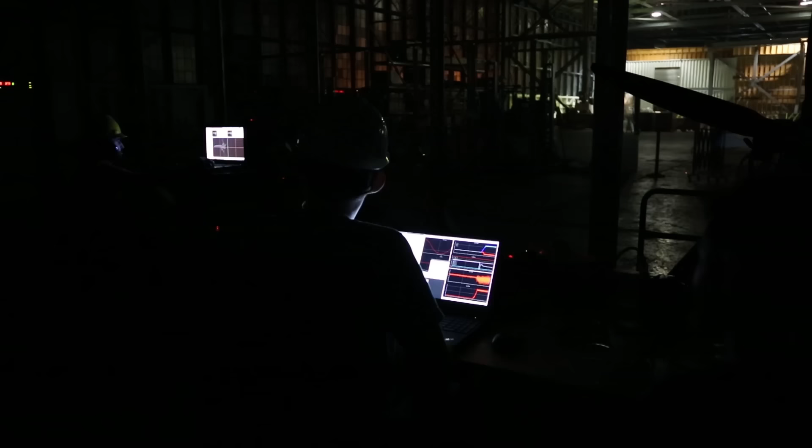It was heroic on a structural mechanics front, it was heroic on a material science front, it was heroic on a power electronics front, it was heroic on an aerodynamics front, it was heroic on the control systems front. It was not a walk in the park on any vector, and it was world firsts on every single front.

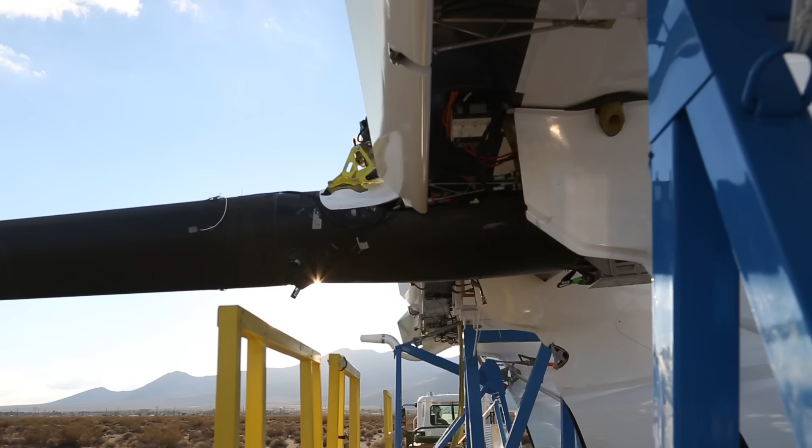Today, our challenge is climate change. We cannot turn away from it. I absolutely believe that we can do something about it. That's what engineers are good at, solving problems, and this is a big one. You very rarely work on something so open-ended. People believed in the audacity of it, in the individuals and their capacity.

All right, it's you now. Oof.

You never know if you're gonna succeed, but one thing for sure, if you don't try, you're not gonna succeed. It's not like one single idea that's gonna solve global warming. It's too big of a problem to be solved by one thing. It's gonna be the combination of multiple ideas from multiple people all over the world.

We got 5 minutes of autonomous flight down. Is that really? I don't know, not in a row. And we got 4 dead kites. Yes, we do. Very dead. 2 were more dead than others.

I guess I like to think about Makani as we're taking wind turbines and we're thinking about what is the best possible system we can build instead of a wind turbine that extracts wind energy. What's the most optimal system? And then we're trying to build that.

In late 2006, I joined Makani Power as the company archivist. Earlier that year, a team of engineers and kiteboarders had begun experimenting with how to harness wind energy using kites. Kiteboarding gave them a visceral understanding of the power available in the wind, and they wondered if they could replace the heavy steel towers of wind turbines with a lightweight, tethered airfoil. If the idea worked, it could revolutionize wind power. So I set out to document every part of the process.

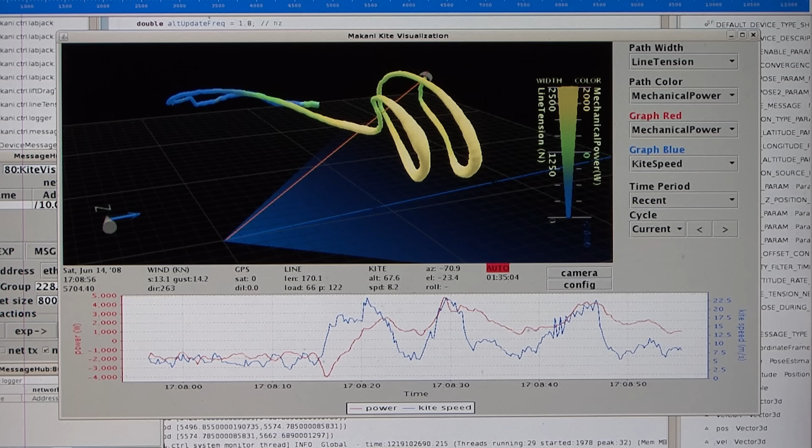After a while of looking at these soft kite systems and developing a simulation capability and analytical capability within the company, we found that the promise of a rigid wing architecture was much higher. This leaves a big problem, though, of how do you get the thing in the air. We started by building a very complex wing, and it was almost the exact opposite of the very quick iterate and test that's possible with the soft kites. We went ahead and built, fully off of simulation, a very complex system. The problem with this is that there's no interaction with reality. So all it takes is one mistake by one person to lose a device like that. That's not a great way to prototype. That's not a great way to make progress.

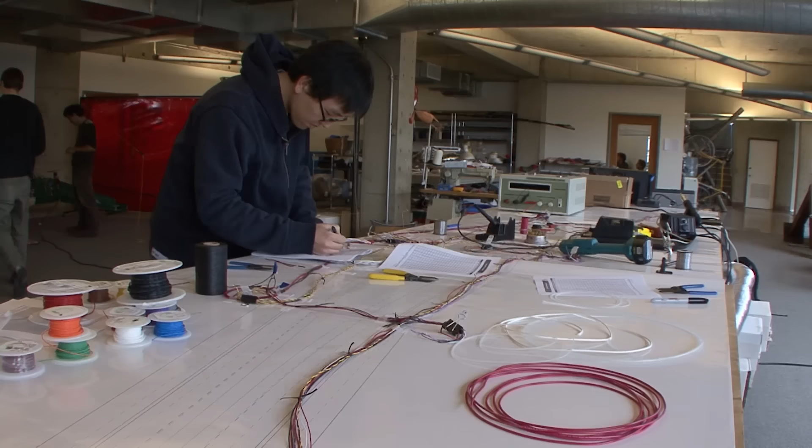It took us 9 months to build our first rigid kite, and we only made one. For a team used to flying and exploding soft kites, having only one prototype felt like not just a bold step, it seemed reckless. For a couple of months, we hovered it under a safety constraint line out near Santa Cruz until we felt like we were ready. Oh. 2.6 seconds of flight. As the 9-month kite splintered, we were humbled by how much we had to learn. The failure of our first carbon kite hit everyone hard, but a few folks on the team had been prepared for a setback like this.

So at about the time that we were getting near finishing this first very complex rigid wing prototype, we started a much simpler, faster test program. Okay, I guess we're ready. Focused on iterative testing. That was high. Bam! The day after we crashed the 9-month kite, we tested the cheap one, and it flew. Watching the kite loop successfully, we knew we were on the right path to learn all the things we'd need to know to harness wind power using very few materials.

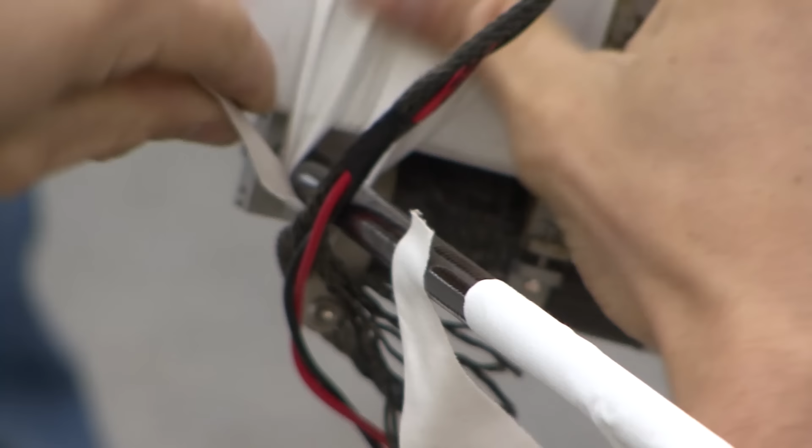Okay, let's do voltage check on constraint release. The next prototype we built was Wing 6, which was itself a little homely, a little hacky, held together by guy wires and tape and made of styrofoam. Okay, burn it.

We had committed to a rigid kite design with onboard power generation. And Wing 6 was built to help us work out some of the trickiest flight maneuvers we had to learn to control. Hovering to launch, and then transitioning to crosswind flight, the kind of flight that would generate power.

Tension is at around 35,000. Still good? Nice. Freaking awesome. Okay, here we go. As ugly as the kite was, the transitions from hover to crosswind and back had worked. Pulling together a prototype to test quickly and cheaply had paid off.

The heart of Makani was always evident in the shop, where coffee was shared, music blasted, things were created and fixed. The lines between engineer and artist, between friend and colleague were blurred. As we invented new technology from scratch, we also needed to develop a common language.

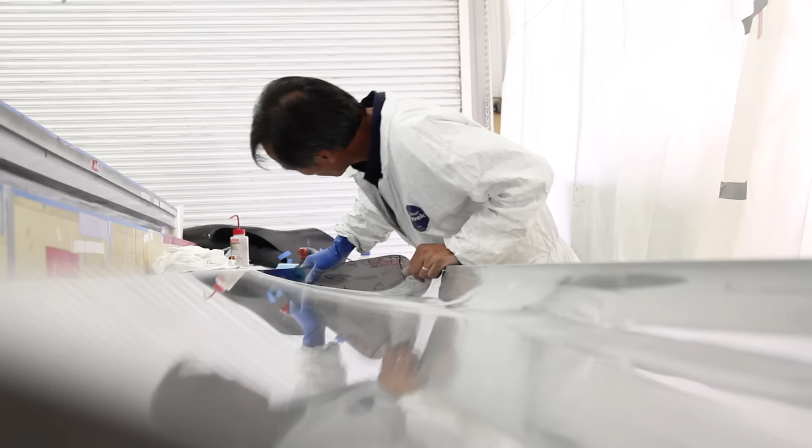Manho was a master craftsman originally from Korea who had made and flown experimental composite aircrafts of his own design before coming to Makani. Tommaso was an incredible fabricator and engineer who had heard about how we were trying to solve climate change using kites and risked everything to travel from Italy to San Francisco.

He enrolled in language school, where it would turn out that he met his future wife, Anita, who also eventually worked at Makani, and learned enough English to knock on our front door and say, "My name is Tommaso Romanelli. I want to work here."

At the end of each day in the shop, Tommaso's blue gloves would be covered in Sharpie, scraps of song lyrics and slang he'd heard and worked to understand. Professor, what's another name for pirate treasure?

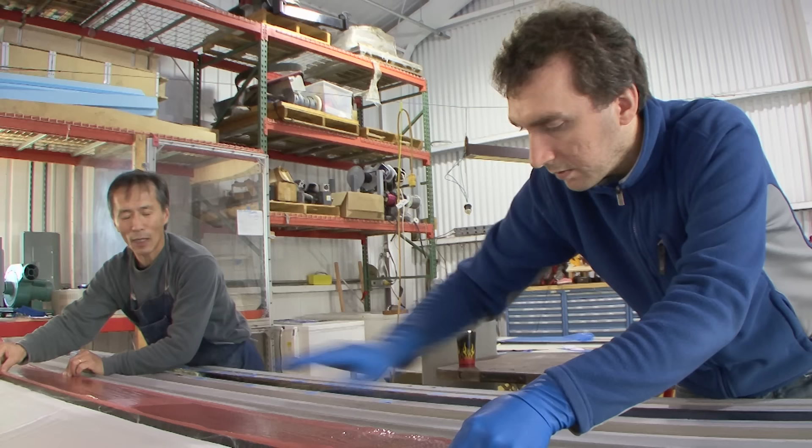Working on hardware was another kind of language, translating the invisible idea of fighting climate change into something we could see and feel, bringing us hope, bringing us together. Tommaso and Anita weren't the only couple in Makani's history, or the only set of forever friends. We'd started out building a kite, and along the way, we'd begun to build a family.

We'd been iterating quickly with cheap materials, and we'd arrived at a design that worked. It was time to build a robust prototype that could scale into a product. With rotors and generators mounted on a rigid airframe to launch, generate power, and land, Wing 7 would generate 20 kilowatts and would demonstrate all the modes of flight needed for commercial operation.

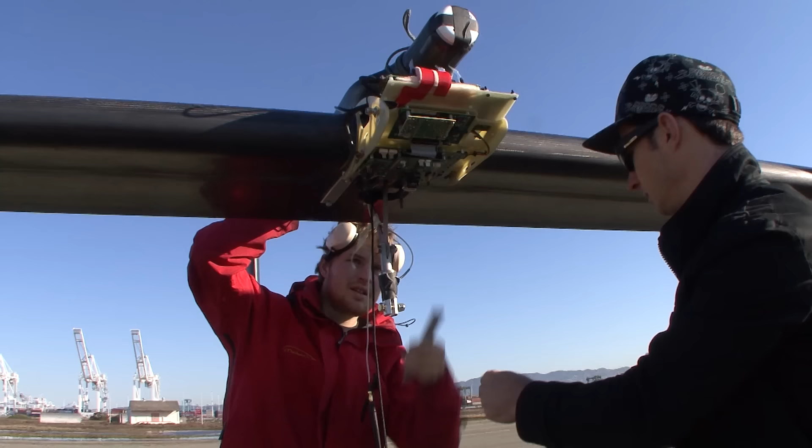Tarek, this is the first ever assembly on the runway. It's just gonna work. It's gonna be so easy. Did I just jinx it?

To support onboard generators and higher flight loads, we had to risk the time, effort, and expense of building the new kite out of carbon fiber, something we hadn't dared to do since the crash of our first carbon prototype. But this time, we had real-world data to inform our design, and we'd secured fixed-term funding from the U.S. Department of Energy and Google.org.

Even with more data and adequate funding, we proceeded cautiously, flying the kite under a safety constraint line to make sure all its subsystems were ready to work together. 3, 4. That's going. That wasn't bad, eh?

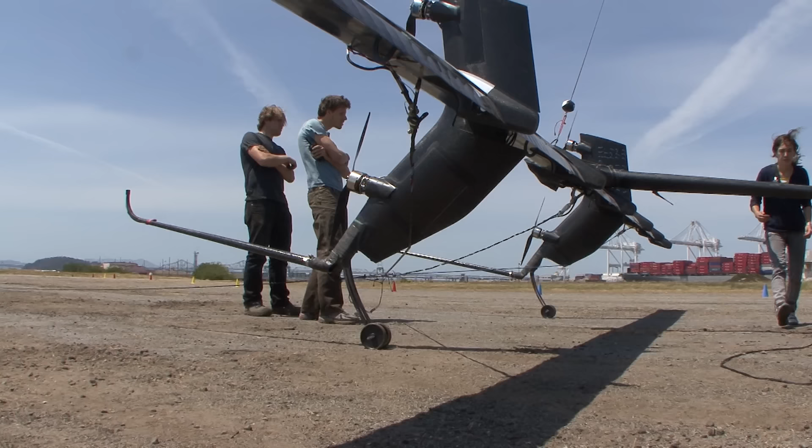No one had ever controlled an aero device like this before. A rigid airframe with the extra dynamics of being tethered to the ground that would fly like a quadcopter and then as a kite. Wing 7 returns to the ground in one piece. But the day came where we couldn't learn any more with the kite safely tied into constraints, and we had to fly it for real.

If the wing were to start coming towards us, we'd only have a few seconds to react. Does everyone have a plan for where they'd go? Something to get behind? Last flap check. Flaps look good. Pilot to pilot hover mode. Pilot hover.

Wind check. Green. 6 meters per second. Stoplight check. Green. Starting data acquisition. E-stop ready? Ready. Pilot ready? Ready. Begin test.

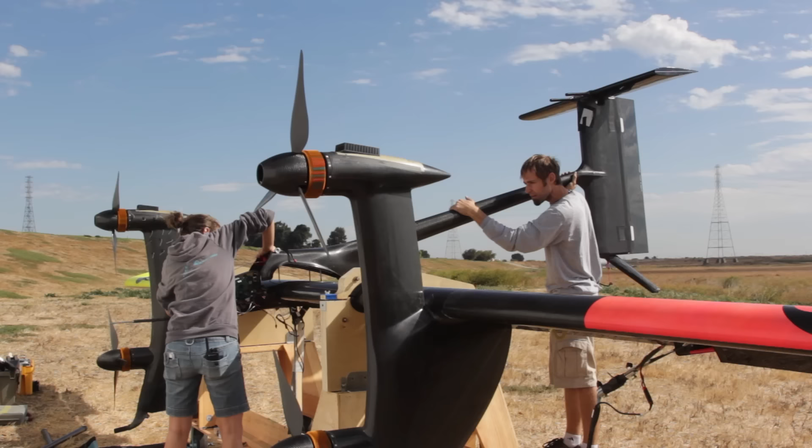Being with the small team of people, maybe we just got lucky or we have selective memory, but generally they got along pretty well. And you have a ton of work to do because you have to set up this thing. You have only so many hours before the sun sets and your test day is over. There's one unified goal for everyone, which is, let's launch, let's fly.

No, I was really hoping there weren't any snakes here. It's a gopher. It's not a rattle. Yeah, let's check. Let me just make sure. Oh, I Google search baby rattles.

Flight testing was like an itch that we had to scratch. Our team was motivated broadly by climate change, but in the everyday we got by with silly rituals, celebrations of small success, and lots of coffee. Around this time we coined the term flangry, which is how we'd feel when we hadn't flown in a long time. This kind of anxious hunger for progress.

As we put hours in the field, things broke, motors overheated, the controller was always being improved. But everything that failed taught us which parts of the system were weak. We fixed it, we moved on. It was tedious, but we inched forward, making real progress.

Then, just in the middle of our cadence of setting goals, meeting them, and setting even harder goals, Corwin, our CEO and one of the founders of Makani, died suddenly and unexpectedly. He had hired most of our team and shaped it. He had baked us bread and made us salad and laid out milestones that were just the right level of difficulty to keep us steadily moving forward.

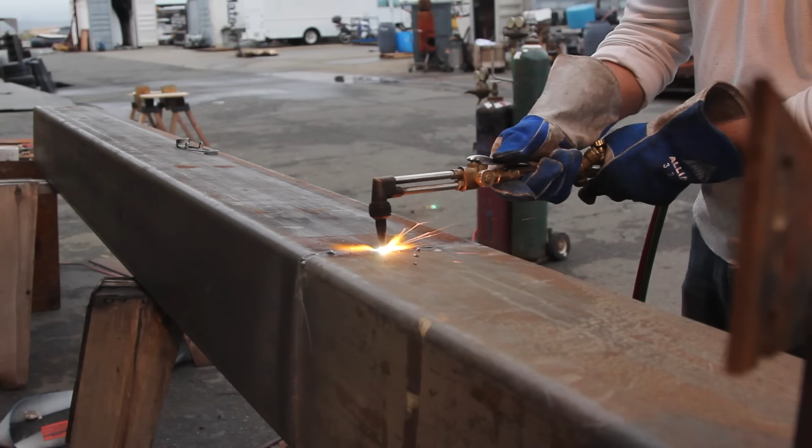With Corwin's death heavy on our hearts, we began preparing for our next big flight goal, all modes. The kite would launch, transition into crosswind, fly loops, and transition out of crosswind to land back on the perch. Coupling one complex robot to another and generating power in between was something no other kite team had ever accomplished.

The new ground station would have three main jobs. It would serve as a perch for the kite between flights. It would manage the tether during each flight mode, and it would connect the tether to a ground power system, allowing electricity to flow to and from the kite. We'd spent 6 years learning how to control a kite independently from a perch, so teaching our sky robot to interact with a ground robot would take a little time.

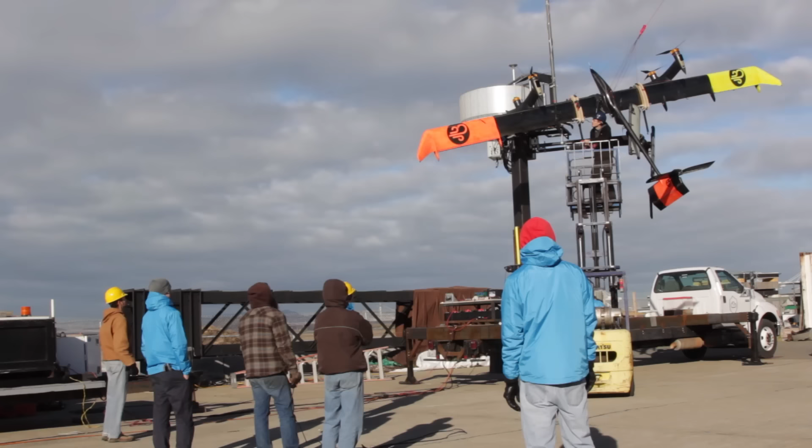We reached a point where we hadn't eliminated all the risk from launching and perching on the ground station, but we needed to test all of the modes of flight together in order to learn more about how to improve the system. We'd been pushing this challenge down the road for years as we solved other hard, but not as complex problems, and we couldn't punt it any further.

Getting the kite and ground station to perform a complicated controls ballet together was possible in theory, but we had to test it. Goal number 1, not crash. Goal number 2, take off and land on the perch autonomously, fly crosswind in the middle. Goal number 3, not crash. Goal number 4, make power.

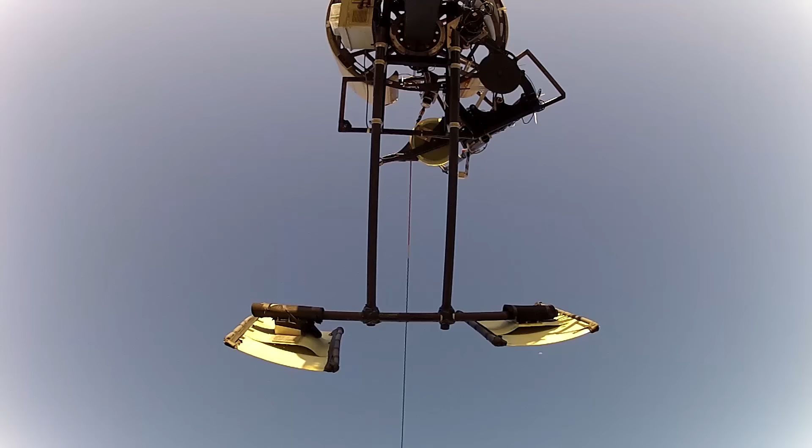XL1. Jensen. It's good. It's good. Let's crosswind. So looks good. Looks good. Wow, it's beautiful. Looks good. What are your tensions? A few more loops like that. 5,000, 6,000. You get up to 10,000. Everything's looking good to me.

It also looks like it's flying way slower. Okay, so now it's trying to go higher. Okay. Close at it. This is the highest it's gonna get. 17. That is barely flying. Alright. And it's gonna come down. It looks good. Wind looks good. 7.8.

Oh, it's very close. Trans out. Trans out. Okay, keep close at it. Alright. Okay. It's a lot of roll. Let it come back. Watch it. Things look good here. Okay. Everything's green. Everywhere out here. Things look great here. You want to bring it closer before you slow it too much?

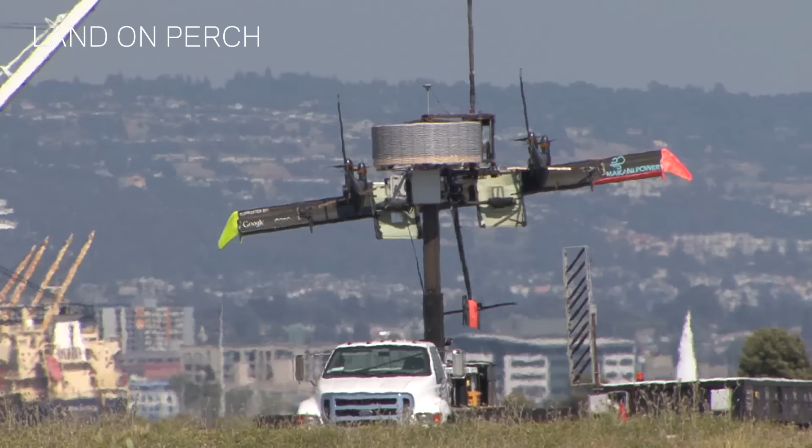Yeah. We're not even there yet. Bring it right. Okay, I'm starting to see the tether now. It looks low. Looks good to me. It does look in this part. Yes! Well done. Hey guys. Hell yeah. That was sick. Next, we're flying for 10 hours. 10 hours of awesome. Yeah, 10 hours of awesome.

Working on something hard for a long time as part of a team and watching it work exactly as you had intended it to is as good as it gets. I think that was amazing. I'm really happy with the results. I wish we would do it again, but there's no reason to today. Let's just celebrate. It just kind of reminds me at least how freaking awesome what we were doing is. I love my job.

Now that we'd proven it was possible to get the kite and ground station to work together, we went on to get flight hours. Accumulating hours in the air would teach us about the reliability of our system and would help us uncover bugs that we could refine in our future commercial kite. I think we're gonna go for 10 hours. You know what a gopher is? The more we flew, the more we learned. No, we're gonna go for 10 hours. Sometimes we achieve what we attempt.

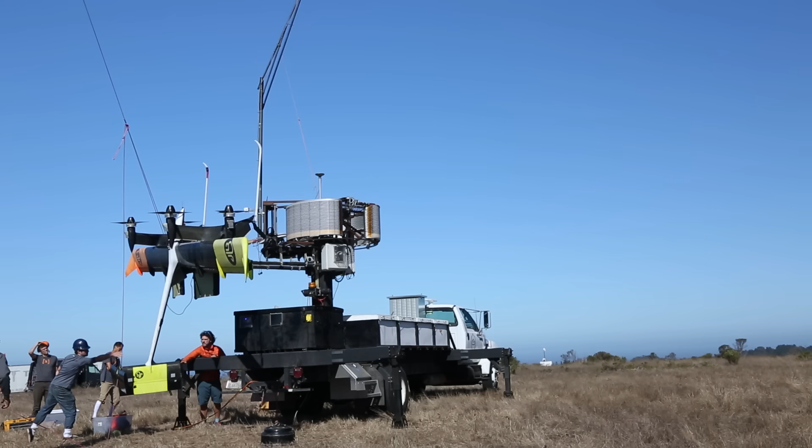Flight testing took a tremendous amount of effort, but that effort led us to better designs. Troubleshooting, swapping components in the field, and managing the ensuing operational and risk decisions took time. But we gained information from the real world that we couldn't have learned through models and simulations alone.

So that means sometimes it's thrust and sometimes it's... Yeah, sometimes it'll be thrust and drag, and sometimes it'll be like both. You're in such deep drag already that both of them are still drag. Okay, so sometimes it will even be thrust and drag. Even though Wing 7 could perform all of the modes of flight a commercial system needed, we were going to have to generate a lot more than 20 kilowatts to make a meaningful impact on climate change. We needed to build a bigger kite, and we needed new investment to make that possible.

We found the visionary support we were looking for at Google X, a newly formed home for ambitious moonshot projects that aimed to use technology to solve big world problems. At X, we would have the resources we needed to scale up to a utility-sized kite that would get us closer to expanding access to renewable energy for billions of people around the globe. So we plan to build a 600 kilowatt system. That's enough to power about 300 US homes.

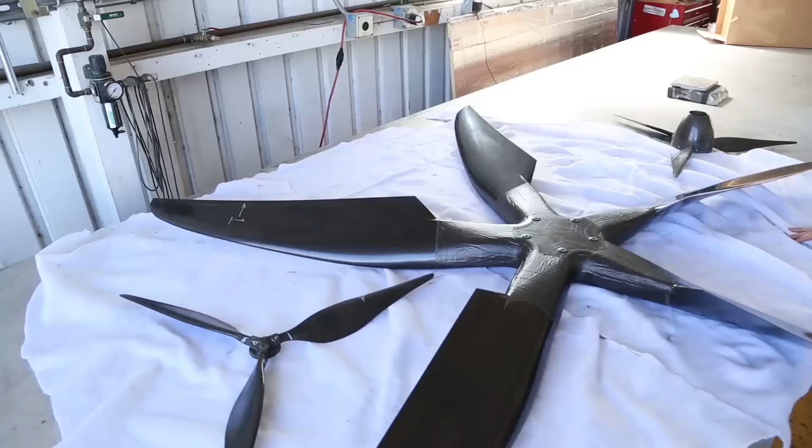We've spent a lot of time in the prototyping stages inventing the best device we can, and now it's time to scale up and start building utility scale devices that can make a real difference in the world. Makani decided to take a big step from the 20 kilowatt Wing 7 to the 600 kilowatt. And so we were designing and building it for probably about a year. Like most things in life, it's the transitions that are the hard things. So going from hover to flight, going from flight to hover.

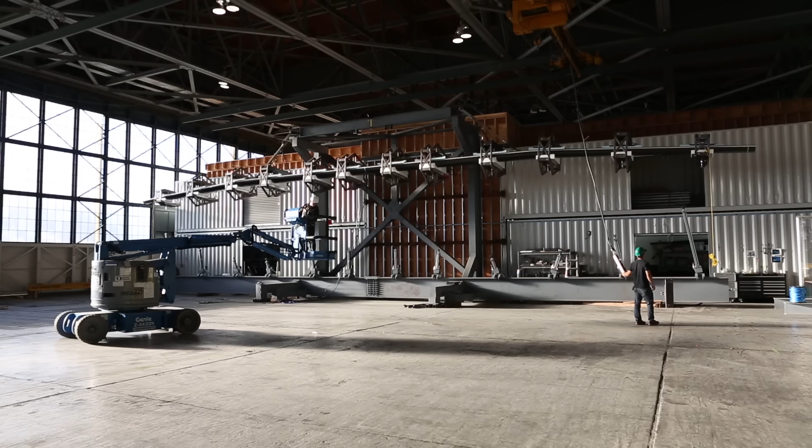I think a lot of the last year was sort of lots of little efforts going on, and it was hard to see it was all going to come together. So this was the building year, and the growing year. When I got here, we were really focusing on design. And we ran into so many hurdles. I don't know if hurdle is the right word. When the hurdle is 3 meters high, it's not a hurdle anymore. But we kept on going at it.

So I'm a little worried that this whole thing's gonna pull down. Okay, let's see, what else do I need to do here to make this look really pretty?

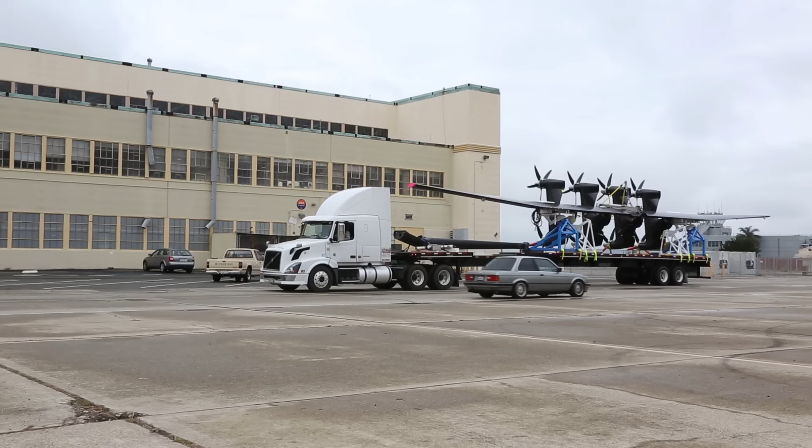Doesn't this look crazy? It looks just like Wing 7. Only giant. It's amazing. No, we're smaller. It's the same size. You guys are all the same height too.

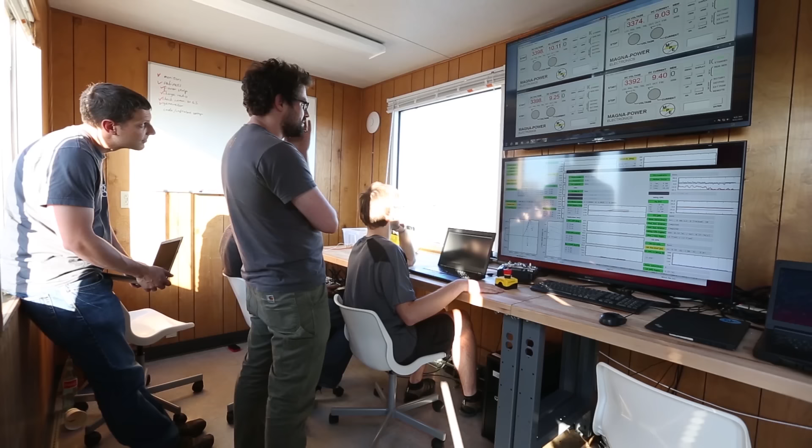It's kind of amazing. We started testing with a pretty small subset of what would make the whole system. Like the first kite that we tested didn't have any flaps or any servos for the ailerons. I think it didn't have a tail. Definitely didn't have an empennage. So we had the wrong wing, the wrong motors, the wrong power system on the ground. But yet everything was similar enough that we knew we would start learning by going out and testing it.

And so for a whole year, there was this cadence of integrate the next new system that's ready, so the new motors that we knew were the good motors came. We would spend a couple of weeks switching them and then go back out to test with new motors. The next time we go out, we had a new inverter on the ground. And that took a while.

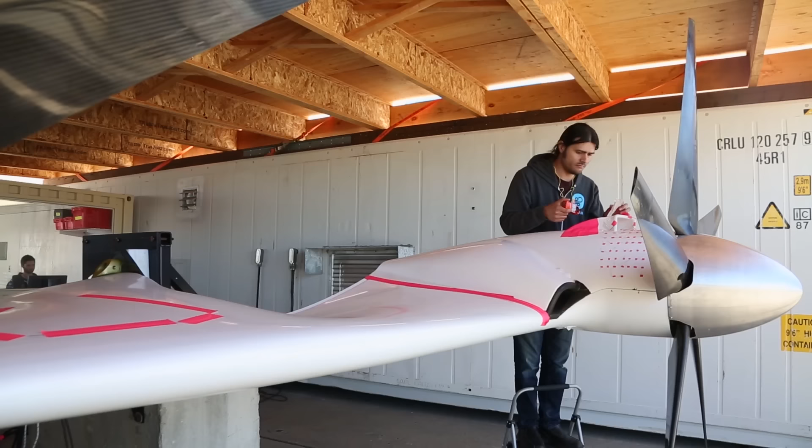That was like a year and a half of continuous integration and testing. But I don't think it could have gone any faster. I think if you had tried to complete the system and then put it together, there was no way you would get it to go.

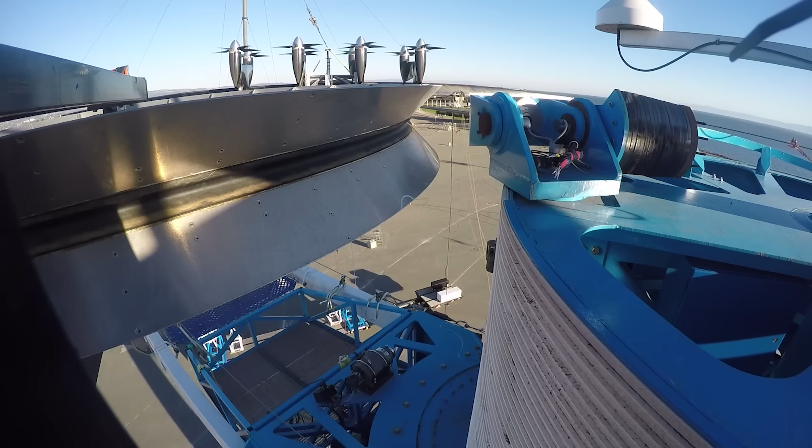After a year and a half integrating new hardware and hovering under constraints with our first utility-scale kite, we were ready to test the kite in crosswind. But we'd found multiple issues with the new scaled-up ground station. We would have to send the ground station back to the drawing board. That kind of design and fabrication would take the better part of a year, and we didn't have the time.

Our team, our funders, and the climate, none of them could wait another year to learn everything that crosswind flight would teach us. While one team split off to begin designing the next ground station, this faces out, right? The GSG is like so. Another team created Container Henge.

A break for a second. One of the things that made Makani fun on the daily was the vocabulary we coined. Objects, procedures, people were adopted and became part of the team. At one point, we had a lot of employees named Jeff. So we had Jeff, Rocket Jeff, Laser Jeff, and just Jeff.

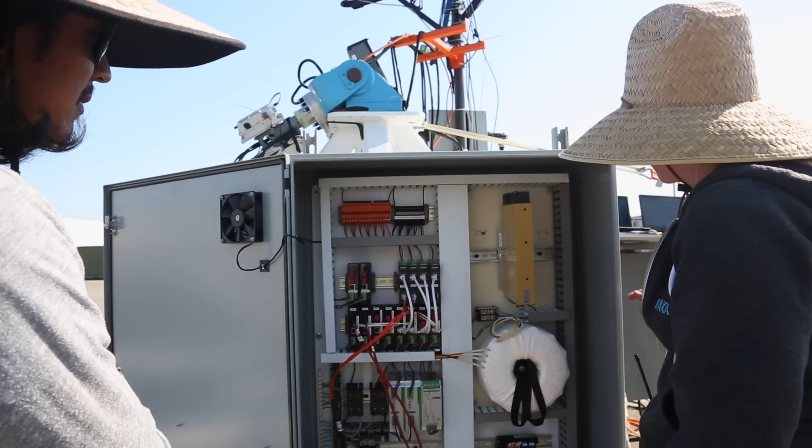Then, Rocket Jeff made a box full of electronics for the M600, and we started calling it the Rocket Box. Even when the Rocket Box wasn't working, which happened, we still had good feelings about it because it was named after Rocket, and everybody loved Rocket. There was a special move we'd do to the kite to make it safe for people to walk around, and we called that the Nicholas, because Nicholas thought of it and wrote the code. Anyway, so Container Henge was one of those things with a special name.

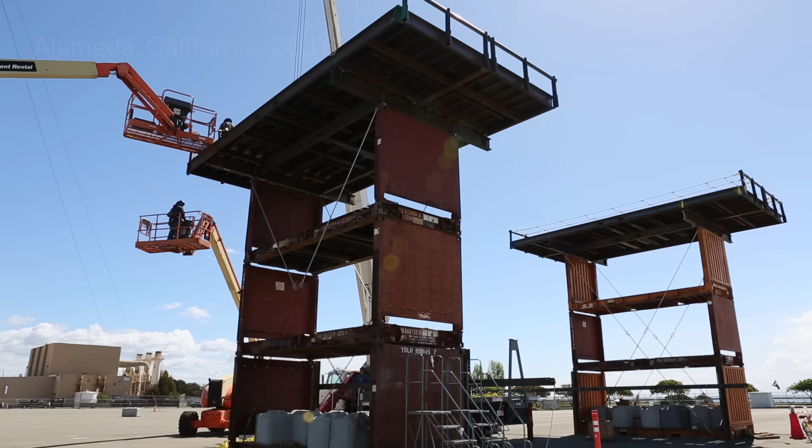Container Henge was the quick and dirty solution to our ground station woes. Made of 2 stacks of shipping containers, it was a remote perch that would allow the kite to launch and land at full tether length, temporarily eliminating the need for the complex hardware that would manage the tether as it reeled in or out. We retrofitted the kite with perch pegs to spread the wing's load across 2 stacks of shipping containers.

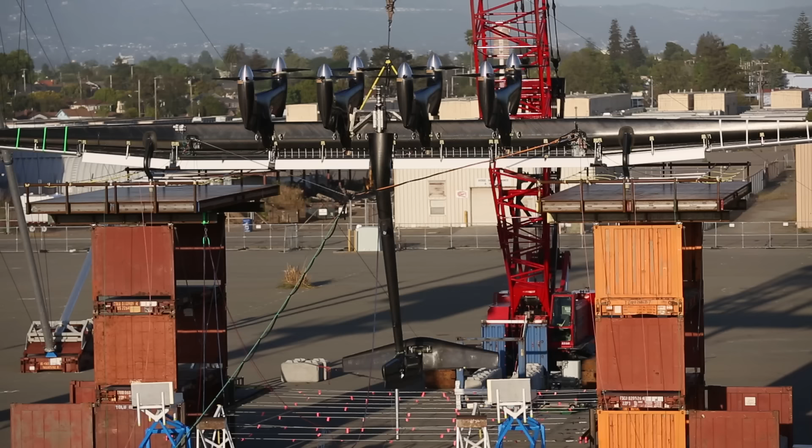Nets on top of each platform made it easy to eyeball the kite's position on the perch and helped prevent the kite from sliding forward with the tug of a heavy 500-meter tether. To keep the kite from pitching forward on the perch, we attached a tail spike that would catch on cables spanning the gap between the 2 stacks of containers. In relatively short order, we'd created an uncomplicated ground station that would get us to crosswind faster. The next step was putting it together with our crosswind-worthy kite, SN2.

So we spent the last year hovering serial number 1. And right now, as we speak, Paula is spinning motors on serial number 2 in the Birdcage, which means our crosswind-worthy wing is about to roll out of the Birdcage, and we're about to switch over to hovering that one, which is one of the last steps in the process of moving to China Lake. We're gonna lift that beautiful new wing over there. We're gonna hover it for the first time. And it's all gonna work. Then we'll do that a few more times and go to China Lake.

China Lake was a remote test site in the desert where we would be able to fly the kite at full tether length for the first time. Before we moved there, we needed to hover the new kite for 16 hours to ensure its hardware was reliable enough for crosswind. But early into our hover regime, we started uncovering bugs. Finding and solving bugs wasn't new, but this time it was different. If we didn't move to China Lake and fly crosswind by the end of the year, we could face a dramatic scaling back of support for our project, or even outright cancellation.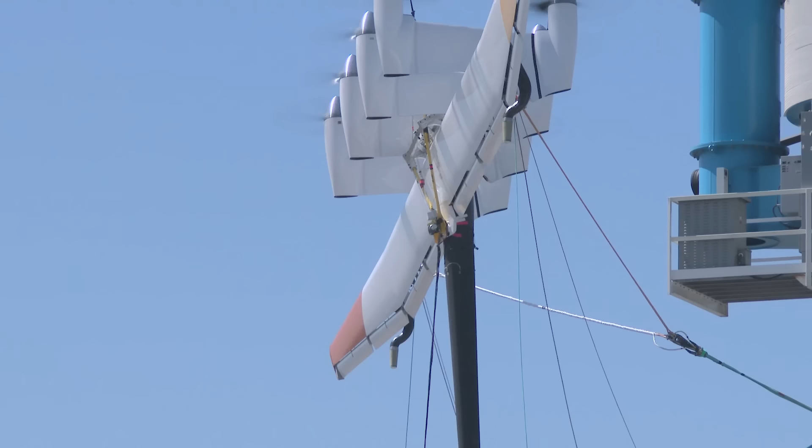Then there were some new oscillations of the pylons. The kite would basically resonate when the motors turned a certain way. Do you want me to do which one we had today? Yours that goes like this. Right. Like this. I don't even know if this one could possibly be real, but that's what it looks like from the footage. And then what do you do? We just lower gains. Just keep lowering gains.

Just as we neared completion of our 16 hours of hover, we were suddenly playing whack-a-mole with motor issues. First, a motor controller fault caused the kite to drop on constraints. Something just stopped. It stopped and fell. That's a drop. That is a drop. We solved that problem, but in the next test, the starboard bottom outboard, SBO, motor didn't spin, and it wasn't clear why. The starboard bottom outboard is not spinning.

I didn't like calling what happened a failure. We all have to own the system. When it falls out of the sky... yeah, but those quibbly details are... 16 hours was just enough. So I was working on the last log of the day on Friday. We had to decide whether to delay further or accept the risk and head to China Lake.

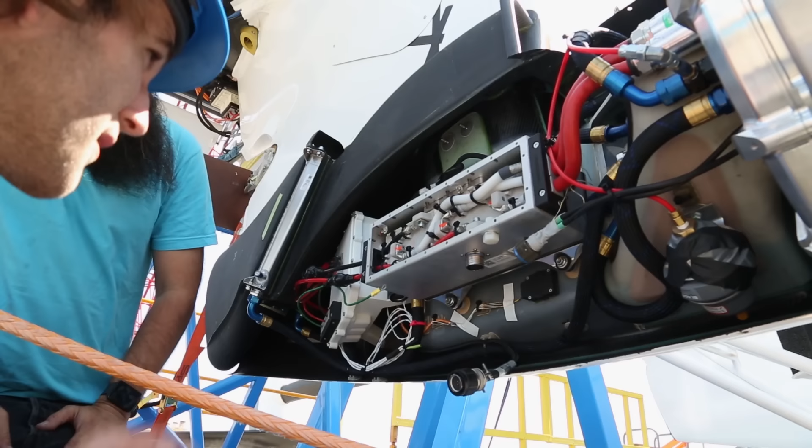It's like the Metrodome, like when you come out of the chute.

Did you decide anything? We decided to do the swap. What about going to China Lake, though? Well, I don't know if I'm allowed to say it. We're going forward with the move, besides possibly the wing, because we might want to debug this, so the move is going forward as is because so many people are committed to it and schedule time is committed to it. So we'll pack everything up, move, take the wing to the Birdcage to do any debugging if we need to, and then move the wing maybe later than it was scheduled to move.

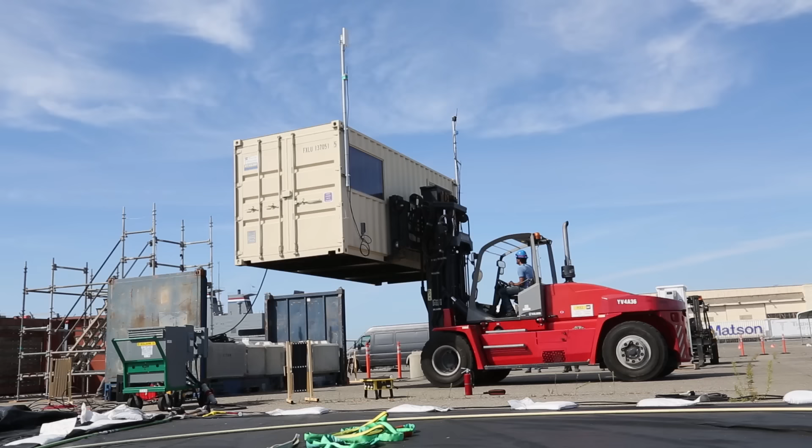We had an unresolved motor bug, but we decided to risk it and move to the desert to fly crosswind. This sort of risk assessment before a launch was a huge part of flight testing. Every single flight, we were assuming some risk and going into the calculation of how much of a big deal is this, and is it worth the possibility that we lose a kite or that we delay the test? Is what we're going to learn about everything else worth taking this one risk?

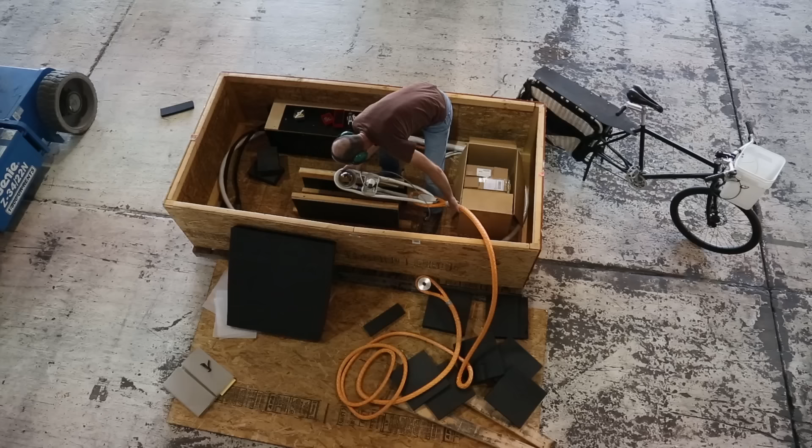If you assume the risk, there's a chance you learn very little because you crash before you actually get to crosswind or some bad deal. But you're going to learn something. Your chances of learning, which was always really our objective, are higher if you assume the risk and fly.

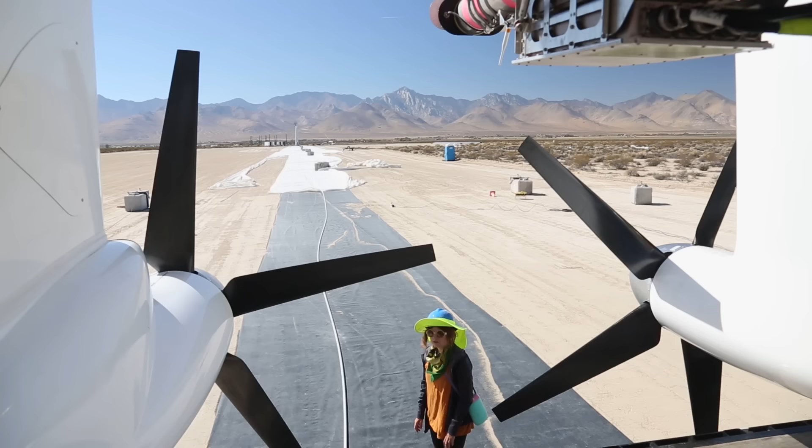Look at how not dusty it is right here. We spun up. You have to do it the other way also, because you have to put the box in here. The farmer tent? Oh, yeah!

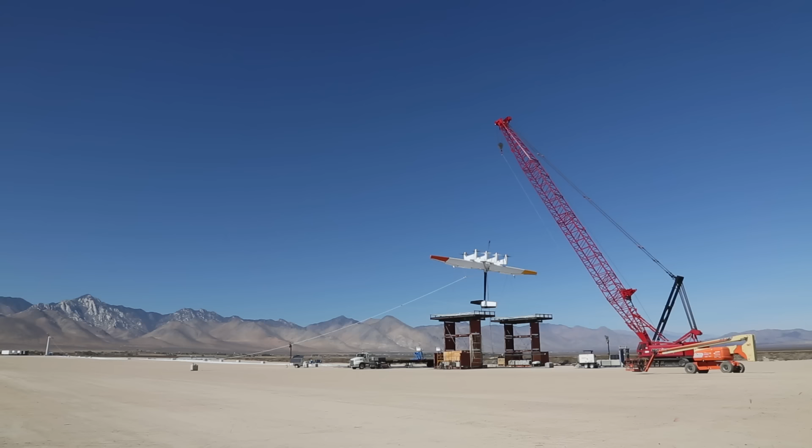That was an hour and 10-minute flight. With the other flight today, that gets us our hour and 15. We need to go to heavy tether test tomorrow morning, so we're going to lower the wing, put it on the trailer for the night, possibly do a little bit of heavy tether setup for tomorrow. Great work, everybody! Yeah, great day!

Yeah, China Lake's awesome. It's really beautiful. We hovered, it all worked, even with wind coming from the wrong direction. Yeah, I feel like we're two tests away from flying crosswind. Makani, teamwork, everyone picking up their own individual grain of sand towards a common goal.

Are you recording right now? Is that one gonna squeeze through? Oh, well, don't try and go at the same time. Oh no, they almost died. Yeah, this guy's pulling. You're getting some guys under it pushing. See, he's the crane operator. That's their Ken.

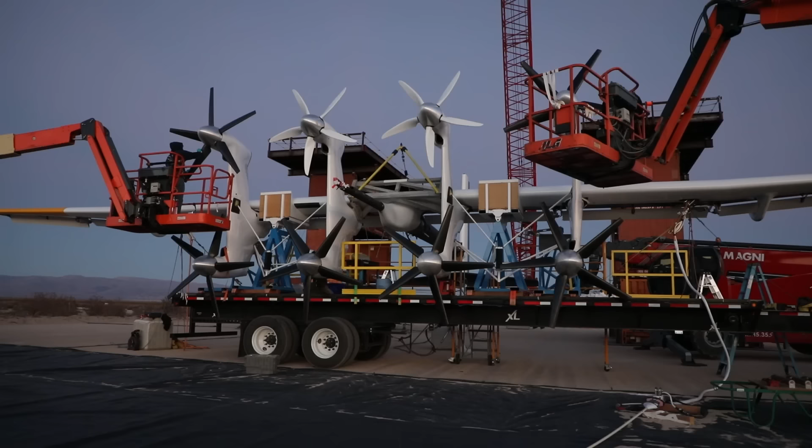Tomorrow, for the first time, we'll fly a 737 size kite without the safety harness. So it's a big day. Ready? Don't get too excited, too bullish.

We'd lifted the kite to the perch the night before, and the only thing remaining between us and crosswind was a routine mechanical check. But overnight, the kite had shifted, collapsing onto one of its perch pegs and splitting the trailing edge of the wing. We needed to demonstrate crosswind flight before the year's end, and a true repair would take time we didn't have.

To fix this is to fly next year. It's true. We had to go for it. We replaced the crushed tip of the perch peg and used rivets to quickly seal the wing.

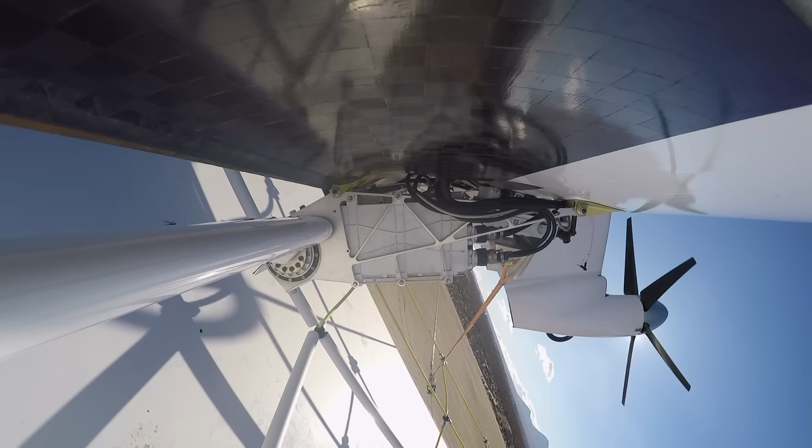We're in ascend. Gain is ramping. Back. There's only one moment of launch. It gets really intense around that point in time and space when we're finally taking off. Port bay flight. That was clear.

Our simulation got us a long way, but some things you never anticipate until you actually fly. The first time we did everything, we didn't quite know what could go wrong. We had some ideas, but those first flights are all about learning the shortcomings that only the real world can show you. Tension is 10.

With plenty of tension. We had checked everything we could check. We had simulated everything we could simulate, but you always wonder, is there something you didn't consider, or something's gonna work differently? Altitude 150. Number 4 still.

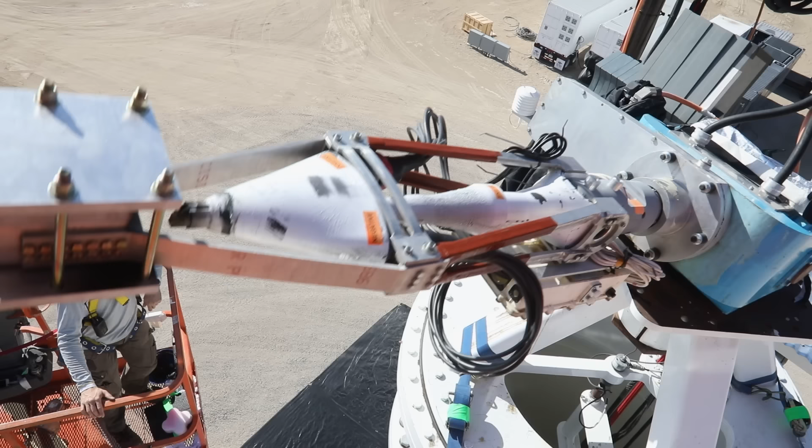We'd flown unconstrained and brought the kite down safely, so in our minds, the first flight had been a partial success. When we scaled up the kite, we had designed 2 kinds of new tethers. One with a solid carbon fiber core, and one with multiple carbon strands. The solid core was lighter, and it had performed well in lab tests, so we'd flown with it first. But in the real world, it failed before we'd made our first crosswind loop.

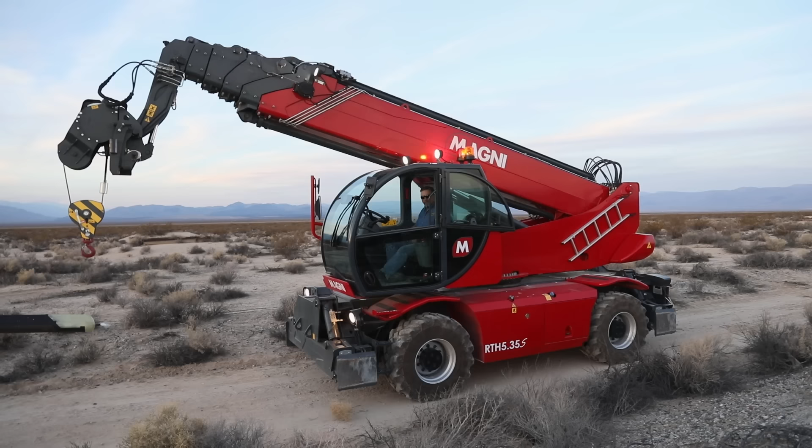Learning that it didn't work as well as we'd hoped was a valuable lesson, but not a lesson that would guarantee the continuation of the project. We still had to fly crosswind. Luckily, the stranded core tether was ready and waiting to test, so we fixed the trailing edge of the wing, spooled out the new tether, and got ready to fly again.

The forecast is not very much wind at all. Small chance we catch it on the way up. Probably also late in the day. Shall we? Or are we afraid? Oh, well, we're definitely afraid, but we also have an opportunity. Yeah. I think we should do it. We should do it. Okay, let's do it. It's 22, that's the right number. Ready? Ready. Throttling up.

Watching the wind. 4, 5, 6, 7, 9, 8. We're in ascend. Gain is ramping. Motors are alive. Tail's clear. Here goes the nose. Wind looks good. Okay, the gain ramp is complete. Starboard side's up. Okay, shooting the gap. Good in the needle. And it's 50 at 4.5 meters per second. Clear platforms. Altitude is 17.

We're in ascend. Oh, it's cool to look out the window. Okay, throttle is 0.5. Altitude is 21. We're in hover full length. We're waiting. We're gonna translate to the correct azimuth.

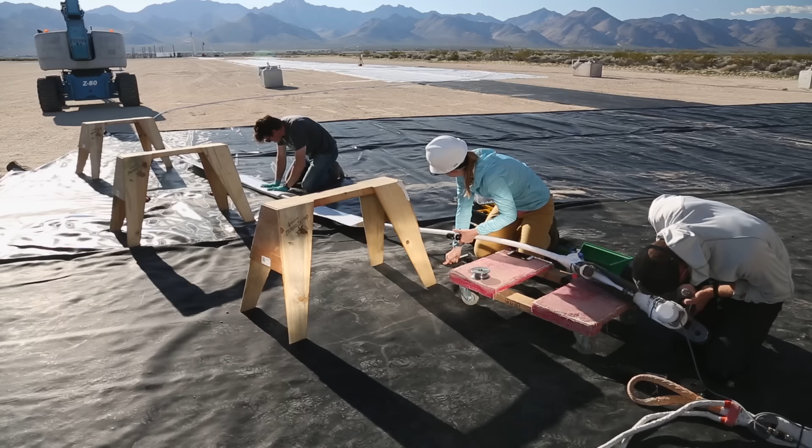So we were just ecstatic when the kite flew for the first time, and it flew pretty good. That was like a major milestone. But after our first flight, we got back to the office and we looked at all of the data and we saw things that could be improved. For example, we saw that the kite wasn't tracking the intended flight path perfectly, or the angle of the nose with respect to the wind wasn't quite what we wanted.

So we thought about how we could fix this, and we came up with some ideas. We tested them in simulation, and then we went to the next flight test and checked how our ideas worked in reality. And through this iterative process, we were able to make it better and better.

We're gonna lift the thing, and first we're gonna put all the things on the thing, and then lift it, and then we're gonna pray for wind, and we're also gonna do a lot of rehearsing this morning. And then we're gonna fly this direction, hopefully for 2 hours. We want to land on the perch, that's the main goal. What did I miss? We're having a meeting. Let's do it.

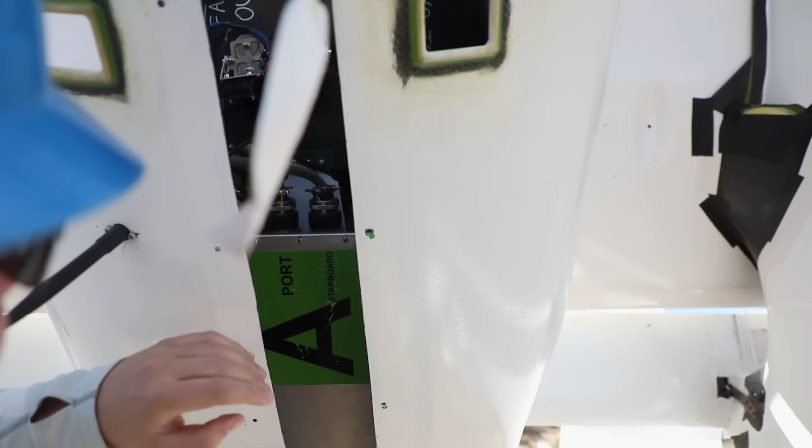We'd already shown it was possible to glide land the kite, but this time the kite's nose had pitched forward into the desert floor. Even so, the landing gear seemed to have protected the kite from serious harm. This one is crazy. You can see that the bond on the mount is really good. So interesting how this crumbles.

Yeah, I designed the landing gear, and I think I very explicitly gave it a 60% probability of success if we landed it in the criteria that it was designed for, which is a very narrow little box. Well, I mean, we are trying to land something that weighs as much as a car on 2 BMX wheels. So that is every bit as crazy as it sounds.

Not having to make a new tail surface is nice. A beautiful case before. Yep. Consider this case closed. Obviously, it did not meet the entire success of having only 4 rotors and the landing gear to replace. Success is a very gray thing to define. I mean, very few things are binary. Did it take enough energy out that it prevented an entire rollover? And did we at least save smashing the tail? I would call that some level of success.

Today is the 1-year anniversary of flying crosswind. It's a very nice bond line, whoever did it. I guess it was a team effort.

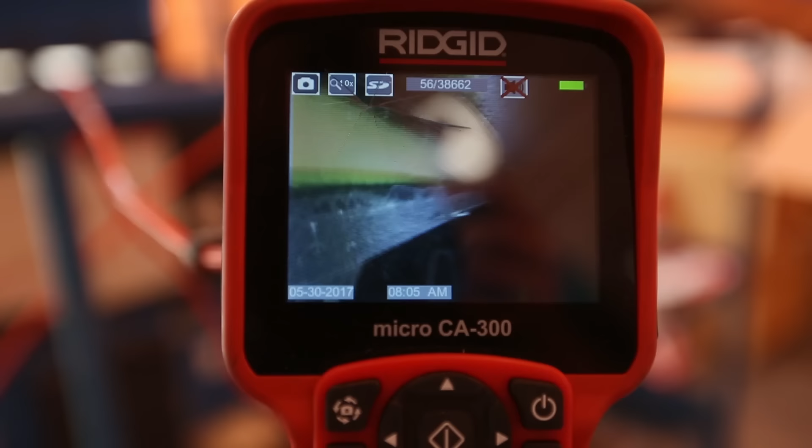We fixed the ground power issue and we fixed the kite, but we'd waited months for a new tether. And even though our hardware was ready, we still had to wait for the wind to cooperate. What are we here to do today, Luis? Oh, you know, what we've been doing over the last couple days. Setting up and waiting and taking it back down again. And starting over again. Hopefully the wind gods come today, right? We're gonna fly. RPX-08, take 3. Like 2.5. All right, we're 7 and 10.

Let's do it. There are sentences about Makani this year that absolutely could not have been possible last year. I mean, you can't say anymore, they're flying, but they're not making any power. Or they have a machine, but they're not flying yet. All of these have gone away, right? We've demonstrated that the product works, that we can make power, that we can do it reliably, that we can fly over and over again, that we can have mistakes and recover gracefully. It was a huge year.

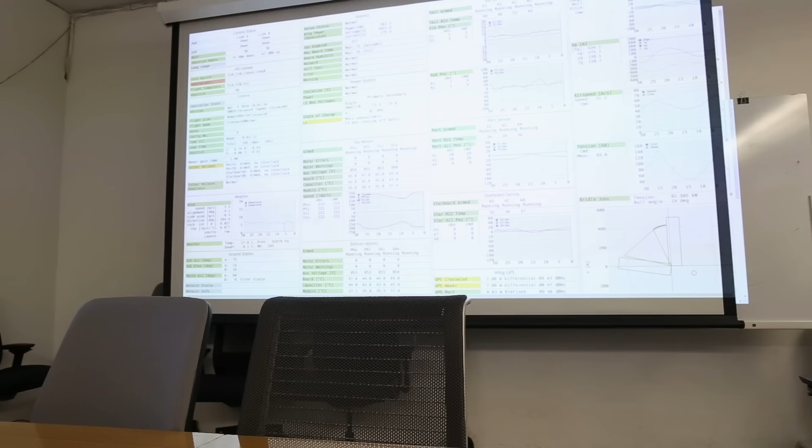But what we're trying to do at Makani is to create a whole new technology from nothing. And so to accumulate the adequate degree of experience and reliability and to be able to demonstrate to investors that the system will have long-term solid performance and economic value, that's really hard to do. It takes a while, and you have to have determination and stick-with-itness to get through those challenges.

We're -8, we're -4, we're coming in. Whoa. Here we go, get ready. Okay. Forcing 5 meters, 4, 3. Starboard wingtip is very close. I think it's down. We're 1 meter. Okay, tail spikes in the right. Sliding forward. Sliding. Okay, it looks like we're down. It's awesome. I mean, we've been waiting for this for like 5 months.

And what was... RPX-08 was our last successful. We've waited a long time for this. I was like, oh wait. And we got it. We waited just the right amount of time. We flew, and now we're down, and we're ready for 09. What runs with 09? It'll be fine. It'll be just fine. It looks great up there.

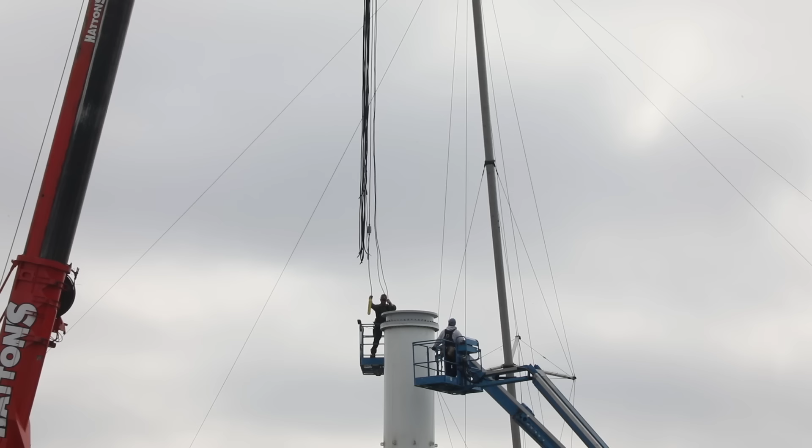Container henge had always been a temporary fix while we redesigned the ground station. Now, our new and improved ground station was ready to test. So while part of the team investigated the cause of the kite's mid-air breakup, we began hovering off of the new ground station in preparation for all modes flight at a new, windier test site in Hawaii.

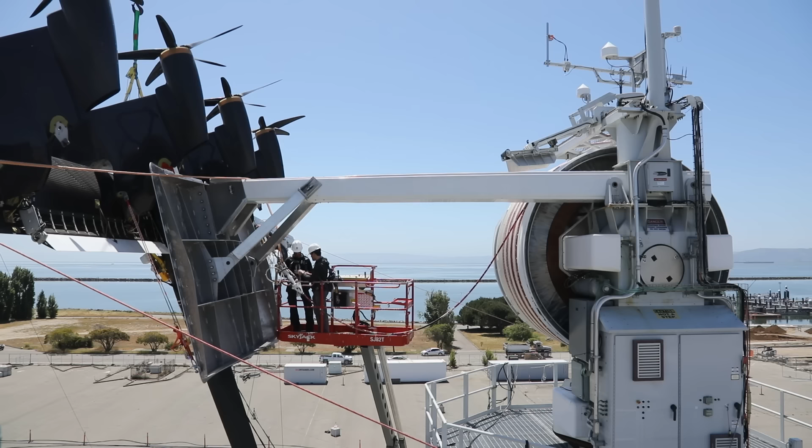This is the last week of testing, hopefully, before we go to Parker Ranch. There's no more tests on the schedule after that, so this week is our last chance to test the hardware modifications we've been working so hard on for the last few months. Just so you know, the wind is not good right now, so we're not spoofing it.

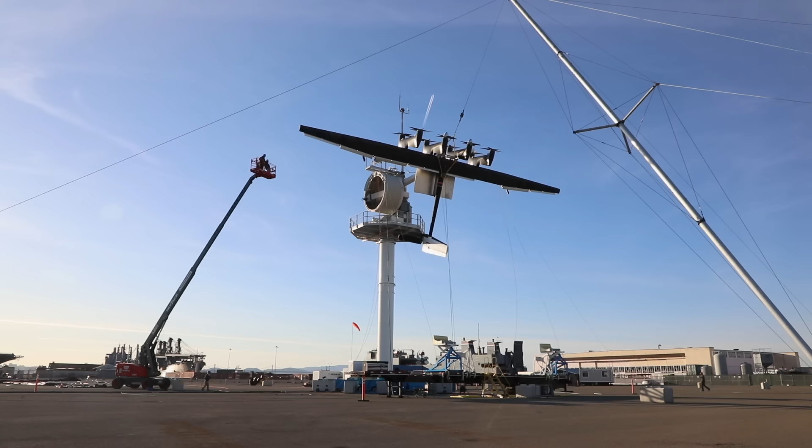That kite and that ground station could break each other. Plus, we need that old kite to test, or we're going to be kind of SOL for a while until we get another new kite that would be riskier to test with. Let's get it going. We gotta move here. We gotta save the freaking world. That's what's gonna happen tomorrow.

If there was no fear of failure, I don't think it would be worth doing, so I probably wouldn't be doing it. Position control's really good. Everything's really smooth. Things are working out pretty well. I'm feeling like they've pretty much done all the risk reduction that can be done here. And it's time to be strong and courageous and take the next big step.

It's a pretty exciting time for Makani right now. We've got so many things that are just about to happen. We're just about to have our first flight at our new test site in Hawaii. We are retrofitting these inverters here with an energy dump system for extra safety.

Hawaii has been on the forefront of looking for ways to find more sustainable solutions to power production for a long time. And that, combined with the really great wind resource and the fact that we had tested there early in our development, made it a really compelling place for us to return to with our full system that would include our ground station and the kite put together for the first time.

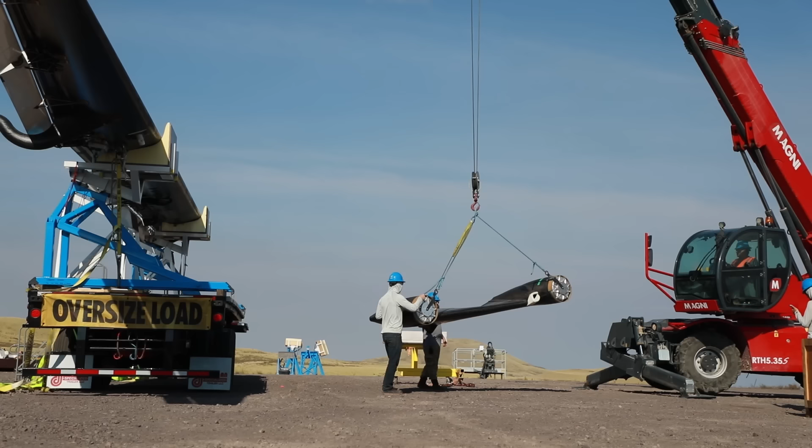As a technology company coming from the mainland, we knew that testing our kite in Hawaii was an extreme privilege, and we felt a sense of responsibility to do it right and to do it safely and to respect the people and the place. We found a test site on ranch land near a gravel quarry. It was a place that would pose very little risk to people and planes and animals. Just doing the work and doing a business here. Everything's working. And we continued to do outreach to the community to make sure they knew what we were doing and could tell us if they had any concerns.

I really want to see it fly. Do a couple of loops. Well, not a couple of loops. We want to do so many loops, it becomes really, really boring.

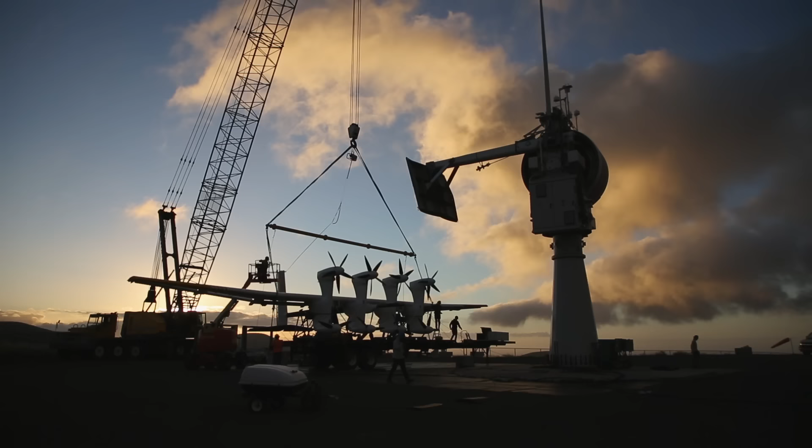As a career, I've always worked in energy, and I know that Hawaii has really viewed itself as a laboratory for how to find more sustainable and renewable energy because the people of Hawaii take their stewardship of the land very seriously. I think we just owe them a big thank you for letting us test there.

This is how future green technology should be. It's a vast grassland with some hilly terrains. And then in the middle of the terrain, there's a white spot. And then we look closer, it's the ground station, and the kite is there. It's a kind of a combination of nature's beauty with futuristic technology. I think it's awesome.

In the RPX program, we had a ton of firsts. It still didn't represent complete functionality of the system because the ground station wasn't there. When we first flew all modes with Wing 7, we'd been scared of how our sky robot would get along with our robot on the ground.

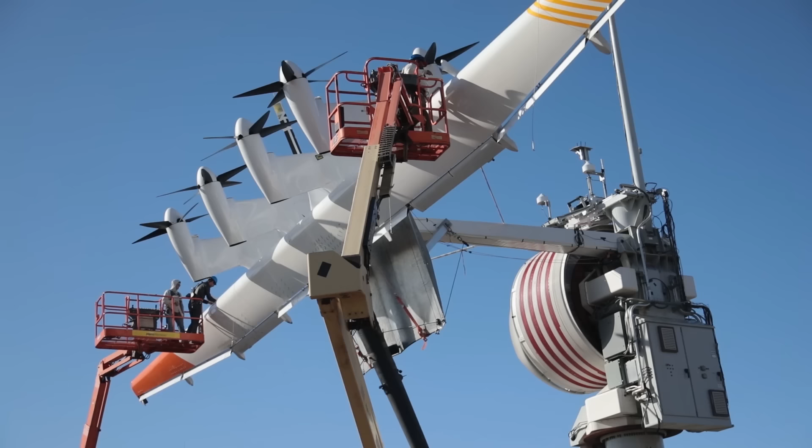Putting the M600 together with a ground station was just as nerve-wracking. We had to hover a kite at full tether length to find out if the ground station could really perform all the operations needed to support crosswind flight. If it didn't work, we risked losing the kite and tether. We did the dry run yesterday.

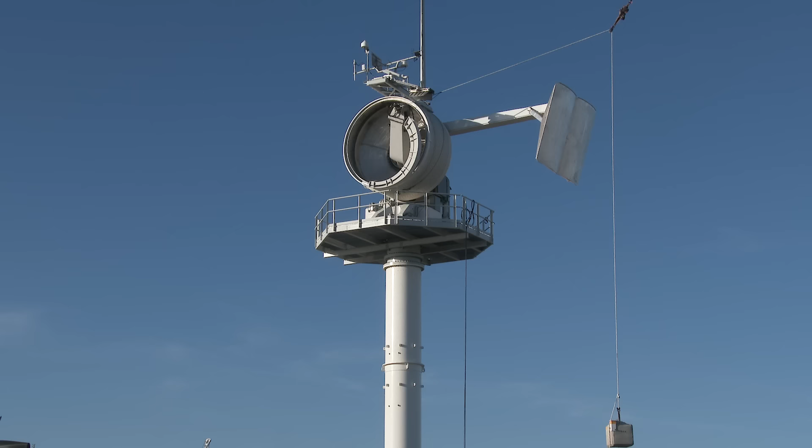Our ground station, the big scary robot, it's like a carefully choreographed maneuver, where part of the ground station rotates by 90 degrees and the tether has to swing through a certain region of it. So, today we fly crosswind for the first time off the ground station. This is our first flight in about 6 months or something, so return to flight is a major goal, and landing successfully, safely on the perch.

No matter how confident we get in the improvements we've made to flight modes that have already been demonstrated, doing something for the first time is going to teach us a lot. And so the testing program that we have going on right now is going to give me a lot of data that is going to be super valuable. All modes is going to be huge.

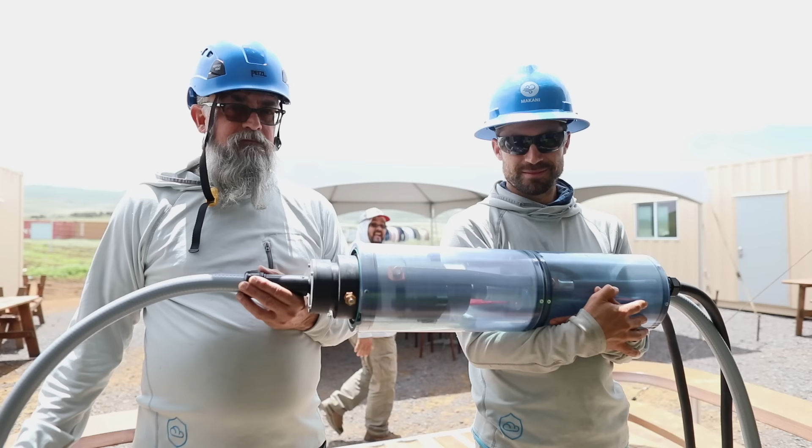Flying all modes with the M600 was something we'd built up to for a decade. Every bug we'd squashed, every late night we'd spent combing through data, every line of code we'd changed, every carbon bond we'd prepped, and every bolt we'd tightened was in service of this moment, combining the whole system.

I mean, we never know what's going to happen when we go fly, especially when you go unconstrained and there's no easy out, right? But we've proven that we can have things go wrong during crosswind flight, and it's kind of allowed us to move more quickly and take some extra risk, but it's also part of the game, right? We know that each time we go up, there's a possibility that it happens, and we prepare by having extra hardware to replace the pieces that are likely to break.

Looking great. You're in crosswind normal. Wind the box, twist tracking. Looks good. Good in the box. Small azimuth slew, it worked.

Makani so far has brought kite energy up at a scale that no one has done before. And it is something very impressive to see such a big kite flying so low from the ground. Seeing the whole system working together really makes you think this is possible. This technology might have some future.

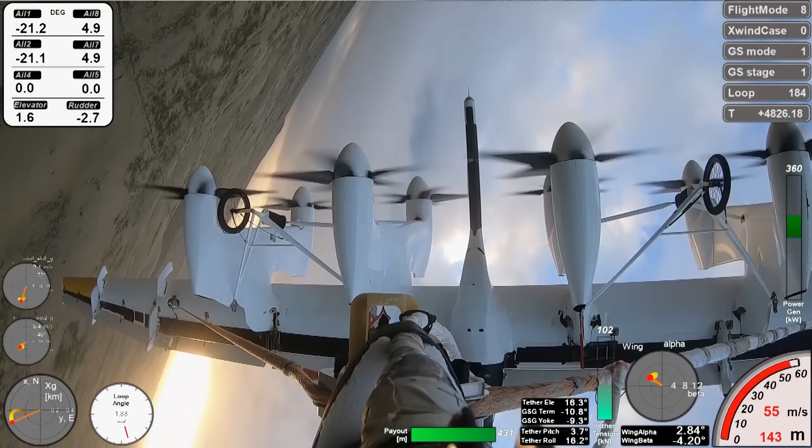But it wasn't enough. In the decade we'd spent honing our technology, wind turbines had advanced to the point where kites were no longer a cheaper source of power on land. Our onshore advantage had diminished, but there was still an enormous opportunity for kites to expand access to stranded wind resources offshore. We had seen this coming, and we'd already bet our future on offshore.

Before we'd confirmed that our flight controls could prevent another mid-air breakup of the kite, and before we'd demonstrated flight from the new ground station, we had begun an 18-month sprint to show that our system would work in deep water offshore. We raced through flight after flight in Hawaii to demonstrate enough reliability to quickly transition our system to a buoy floating in the ocean.

In order to make the Makani technology successful, you had to demonstrate all of these things. So you can stagger them in time, but then it's going to take longer. Or you can try to solve them all at the same time, which is what we were trying to do. It's not because we were being naive about how engineering is done.

It's because we didn't have enough time to do it methodically, one thing at a time. If Makani's technology was going to succeed, was going to be able to effectively, efficiently harness energy from the wind in a cost-effective way in offshore geographies, we had to fly off a floating buoy. We couldn't delay that. That was going to take a long time to develop and to do. So we could get started right away, even though we were still in parallel solving other existential problems. Or nothing. I was going to say or delay, but we couldn't delay, because the problem we were working on solving was one that had to be solved immediately.

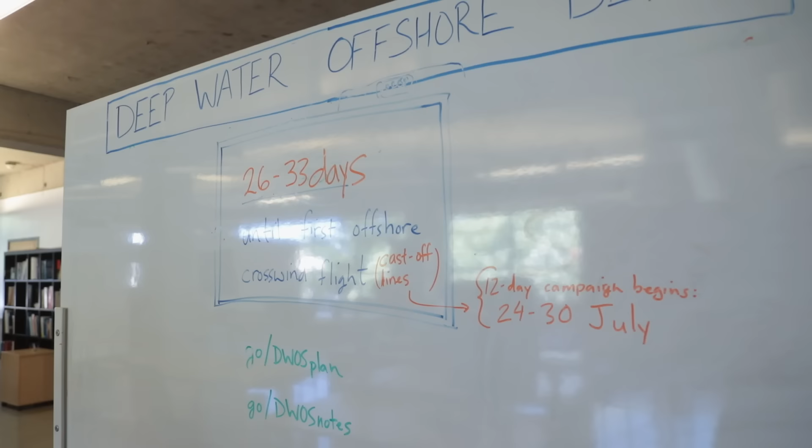It's just the sea surface cable that's untested, comms-wise? Because we're not just going to go straight to spinning motors if we haven't checked comms. A lot of things have to happen in the right order with very few people. But it's cool that we're talking about that today. So it's coming together. It's real. It's not a dream anymore. We're going to Norway, and it's going to be just a matter of weeks now. Like 26 to 33 days, according to the whiteboard behind me.

Seeing this beautiful lightweight structure, it almost makes my mind explode with possibilities. I look at that and I see all the deep water coastlines that are near population centers, and you really fundamentally see something that can scale and that can bring renewable energy to so many people. I mean, hundreds of millions of people.

It becomes immediately clear to you when you go to Norway and you go to Stavanger and the Haugesund area. It's unavoidable to realize that this is a place where people do things in the ocean. They're in the business of doing strange things in the ocean. And so it really felt like this is the place for us. I think the Norwegian people have a really great cultural fit with Makani and what we're doing. People are comfortable with a little bit of risk, with a lot of uncertainty.

We really constrained ourselves to work with the technology and the existing stuff that Makani had. We've been able to basically take our onshore testing and move it offshore. We've pushed it together a little bit more and put it on a barge. Yeah, we're showing up and it feels like a fully fledged test site where it's mostly things we totally know about, just in a different place, which is really cool. But there's been a big effort to get this ready.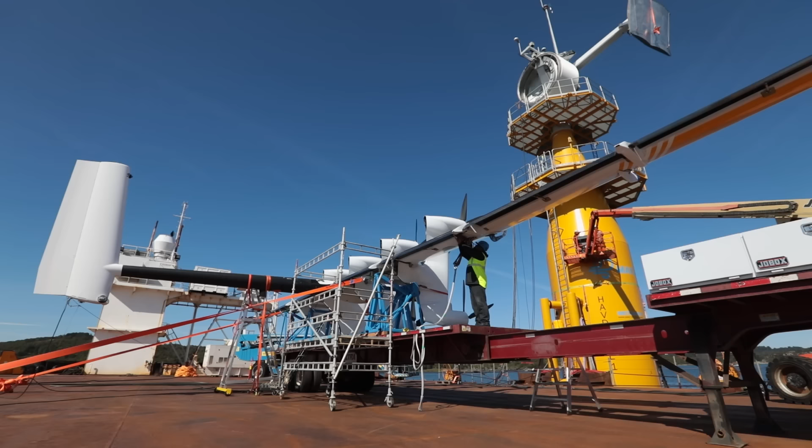Generally, doing things offshore at sea is just harder. The environment's way harsher. There's a whole slew of things that once we cast off from shore, you can't really fix. So if one of those things goes wrong, then you're between a rock and a hard place. Getting to the spar that our base station's sitting on and our kite is at is hard and could be dangerous in high seas or bad weather.

Joy. Yes. I'm just really happy to see it, and obviously a lot of people have been putting in a ton of effort to get there, and it's just kind of shocking that we're there and might see something really cool happen in a couple weeks. The spar buoy is called Havdraga 1. Draga means kite, and it also means dragon. So it has this double meaning that I really like.

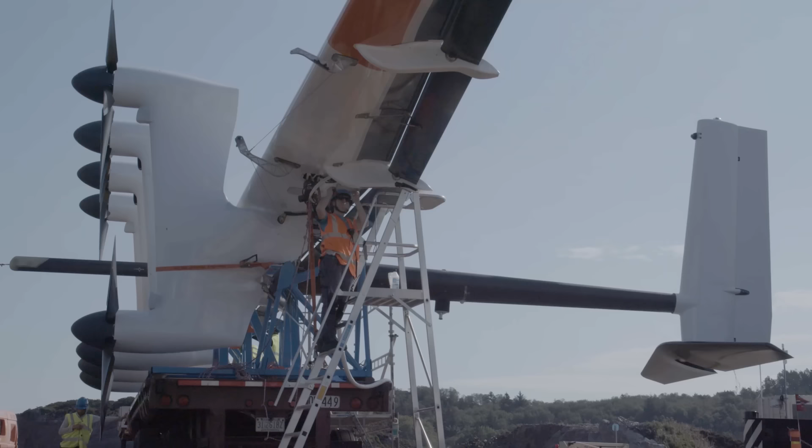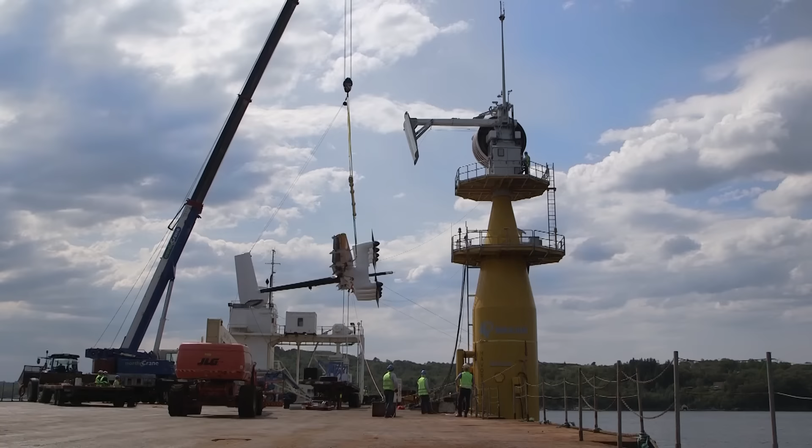Normally, deepwater offshore wind programs take many, many years to develop. Over the last 18 months, all these steps came together. A plan was laid out that looked, I would say, bordering on impossible. Barely feasible, if everything went well. Behind me is Sleipnir. We are 2 days until tow out, and the lift went beautifully.

The whole team at Makani, once we kind of wrapped our mind around the fact we were going to try to do this, and everybody started pulling together, the whole is greater than the sum of all the parts. All these teams working together have put together something that we individually might have thought, this is impossible. For some of us, like Crystal and Alan and Luis, you guys are just handing off the kite and now hoping that everything you touch works, so thank you guys for getting to this point, how big of an accomplishment this is. So first, thank you guys, this is amazing.

Offshore seemed like a fantasy not that long ago, but it is very real today. The tow out has been set in motion. Only half a year had passed since our first crosswind flight from the ground station in Hawaii. And now we were halfway around the world getting ready to fly crosswind from a moving base station floating in the ocean. We were used to pushing hard to pull off increasingly complex feats of engineering. And this time we had surprised even ourselves.

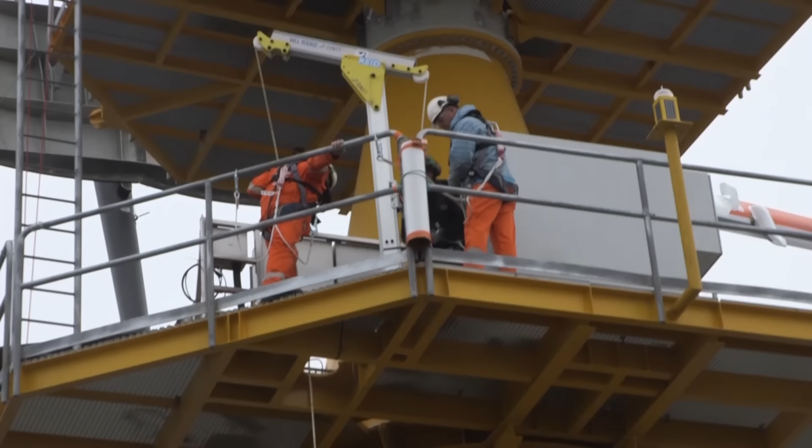After a full spring of flight testing in Hawaii, there were only a few weeks of summer left in Norway, and we knew we would probably only get one shot to fly offshore before the sea state would be too rough to test our kite. We're not just launching and landing. Now we've got a buoy. It's a floating foundation just tethered to the seabed with one little cable. It has to know exactly how that buoy is moving in order to be able to land.

So it's too complex to be analyzed using only math and simple expressions. We need a full simulation. Well, it's the first time anybody's done something like this. I've never seen a buoy like that move the way we're gonna make it move. Soon we'll have a moment of truth.

The cable has been connected mechanically, and I believe they're working on connecting it electrically. So, let's see, it's past 8 p.m. on Sunday. We're hoping very much that we can turn on the kite and make sure that everybody still talks to us, get our first measurements of the buoy motion and the GPS performance. So far, nothing is broken. Continue to hook up the sea surface cable. I've never seen so little wind. It's all working.

We're going to work. We're going to fly a kite. The spar is probably 15 minutes away. Just a normal routine, but at sea. So we're just commenting on the commute. This is a different commute than we had either in China Lake or Parker Ranch, but it's pretty cool to commute by boat like that in the morning. It's a beautiful sunrise. I think a successful test is any test that actually launches.

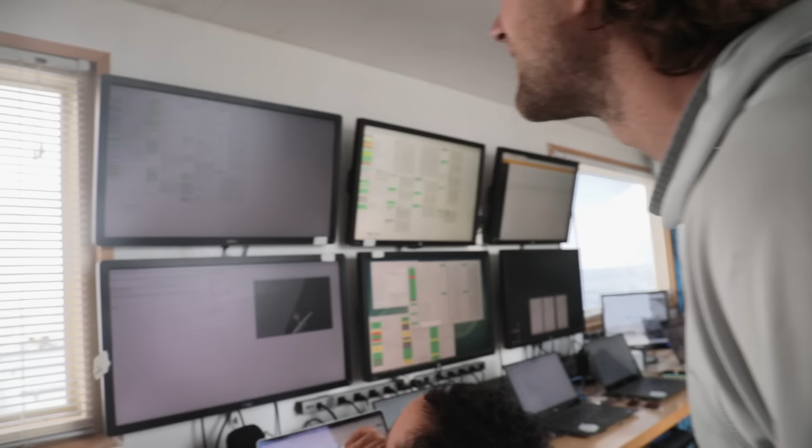Our simulations show that launching is not that hard, so that'll probably go fine. Reeling out will probably go fine. Trans-in will go fine. Crosswind will go fine. The biggest challenge in the test will be, of course, to land. Gonna fly! Wind's supposed to come from there. Kite's in the right position, ready for it, and it could happen. Yeah, the forecast is for a nice building breeze.

The thing that's amazing to me about making things real is what you learn that you can't imagine. There's always that healthy voice that tells you, are you sure you've looked at everything? Are you sure it's gonna work? Tomorrow, we're flying in Norway, and it's early morning Alameda time. So we expect the masses of very excited engineers to show up at midnight with pizza and breakfast to see the flight.

What time is it? Game time. Game time, that's right.

Yeah, I'm gonna get the throttle right below 0.8. Oh god. Ready? Looking good here. Going. Gain is ramping. Gain ramp is complete. The altitude's dropping a little, but it caught itself. Good. Beautiful, beautiful. No saturations. Tension is 9. Level 1, observe.

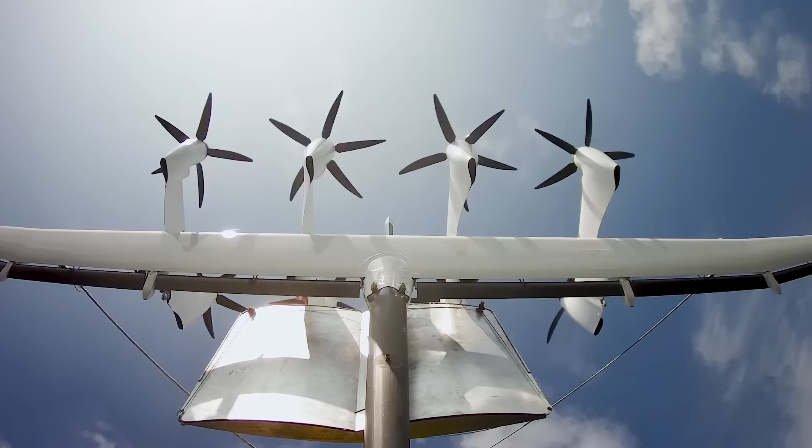Yeah. You're on the perch. Yeah, over the perch. Descend. Starboard hooks in a tooth. Coming down. Port hooks down. What just happened? It's really close to falling off. It just skipped a bunch of teeth. Did we gain ramp? Yeah, gain ramp is down.

Okay, hold on. Let's go down. God. I can stop the ground station if you want. We need to go back. Is the starboard hook in the sawtooth? It is. Okay. We found the error, fixed it, and prepared to launch again. Threshold. Sounds good. And everybody ready? Ready. Ready. Okay. 3, 2, 1.

Bottom up swell. Launch. You're in ascent. Okay, you're at 0 elevation angle, you're in payout, and the engagement sensor says engage. Release the winch. Winch velocity is increasing. Clear. Elevation angle. There she goes. Is she stable? 9, looking good. GPS agreement improved greatly. Alright, altitude's 100. Payout crossing 300-ish.

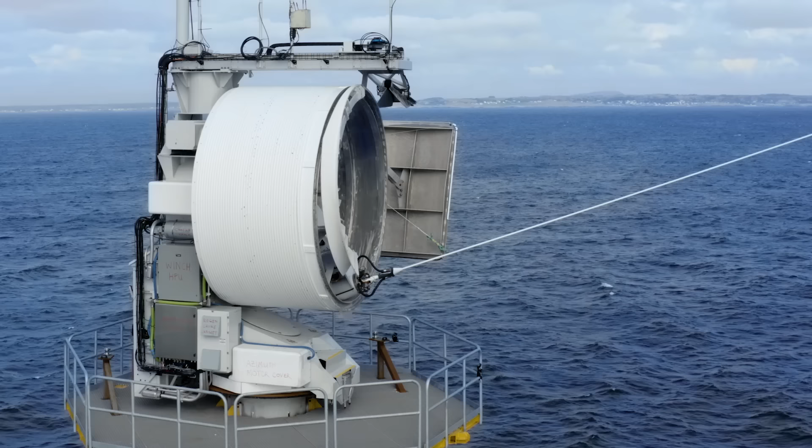Perfect. Crosswind normal. That's a nice gradual return into this here. Alright. D2 is looking good. Making the turn. Aero angles look super. 3 o'clock. Super. Wind is 9.7. Oh, look at that blue go. 9 o'clock. Azi error looking good. Aero angles great. 90. Can you guys believe that? We're flying crosswind in the North Sea.

So cool. You know, a machine achieves perfection, not when there's nothing left to add, but when there's nothing left to remove. Like a standard horizontal axis wind turbine just looks very natural because its design has evolved to this state of near perfection. But it wasn't always that way. It was at one point a radically new technology that was kind of like Makani is now.

The word I have is like, you know, it's like 横空出世. It's like something you feel that it's never been there, but it just emerged suddenly. At first, you don't know what it would do, but once you see it take off and function, you say, yeah, this is something that it's born to do. It makes me feel the ocean is smaller than it is, but just because we are looking at it from such a long distance away.

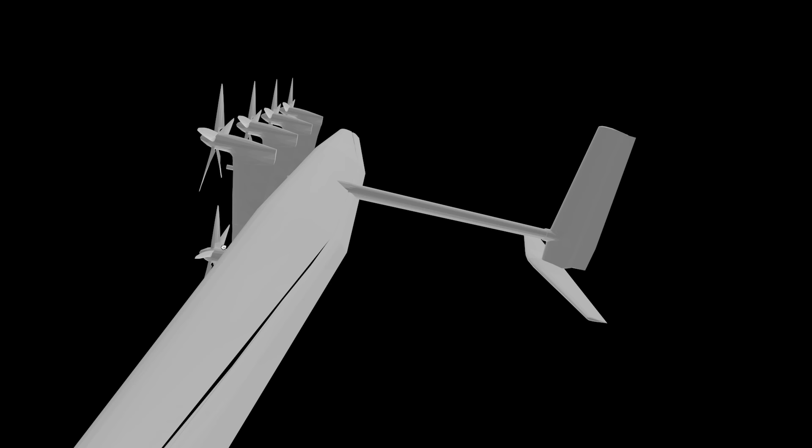Meanwhile, another part of the team was already sprinting towards another milestone to redesign the kite in a way that would produce more power. It was a 3-month project. It was called October Kite because the end of the project was October. Take out the innards, which are really quite impressive and awesome, and then just transform them into the new kite.

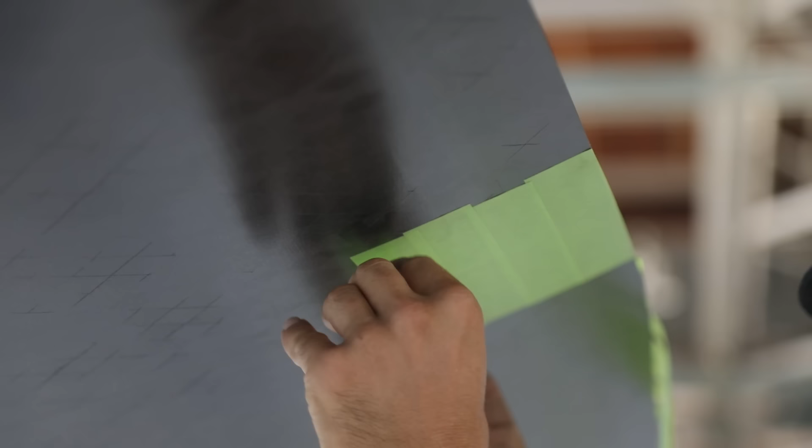So the analogy I would use is it's basically like a re-wing of a design, which is, I think, a pretty standard thing in aerospace. So we're just going to take it all and just transfer it to a new piece of carbon. So that's the idea. The October Kite team came up with a simple design that would increase wing area for greater lift and more power production. It would be ready by early 2021, and in the meantime, we would keep learning with the M600.

When we got home from Norway, we took the lessons we learned there and we fired up the simulator, started thinking of ideas, and began implementing fixes for what we observed in Norway. And then the next step was to fly again and test those changes.

That looks legitimately good, Robbie. The butter, some sugary jam on good bread. You feel better? Robbie either fasts or just goes for it. Feast or famine. I'm in his camp. That's how I roll too.

The wind forecast shows, actually both wind forecasts show wind going northeast around like 10 or 11 o'clock. It's kind of ideal. It's not a super strong trade wind pattern like 2 weeks ago where it's blowing 15 to 18. We would spend the fall and winter flying in Hawaii and testing improvements to the controller before returning to Norway next summer, when the weather would allow us to go out to sea again.

So I think nobody really knows, first of all, if it's practical to have an energy kite, and the right way to do it. And so there's a lot of questions that need to be answered, and some of them are super interesting to me.

And the goal of the company is to prove that the technology can be developed and that it would make sense to do it. So I think our mission right now is to prove that we can do that. Do you have a

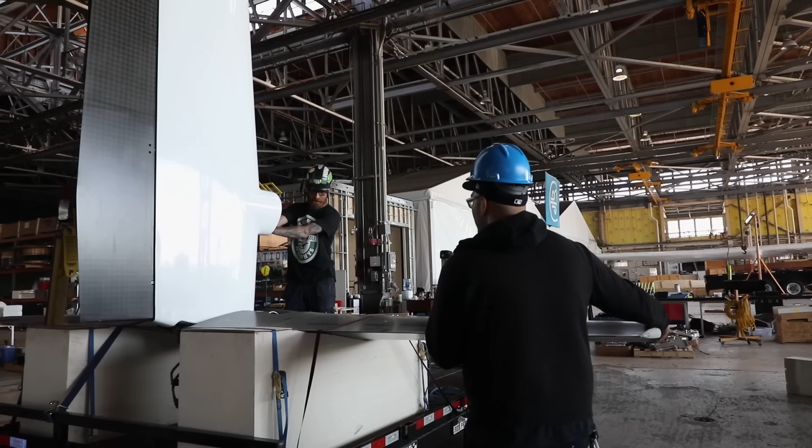While we didn't achieve everything we set out to do, we learned to move beyond conventional thinking, solve massive problems, and redefine our notions of what is possible. When it comes to climate change, we can't afford to stand on the sidelines, and we can't wait for a surefire solution to come along. We have to plunge into solving problems that seem impossible. We have to risk the chance that we will fail, because that is the only way we can possibly succeed.